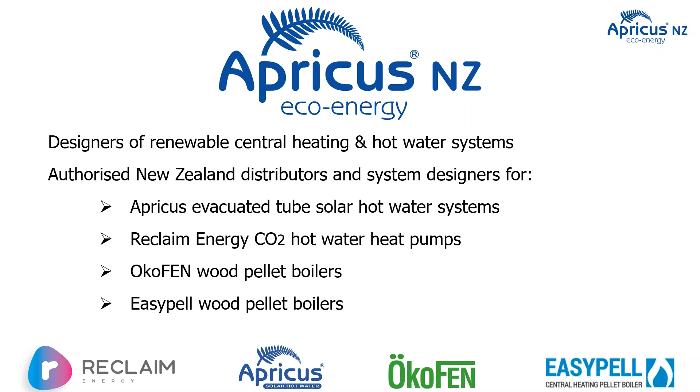Just a little bit of background about who Apricus NZ Eco Energy are. We're the designers of renewable central heating and hot water systems, and we design and distribute for a few companies. The Apricus name comes from evacuated tube solar hot water systems. We also do a CO2 hot water heat pump called Reclaim. We have the OkoFEN wood pellet boilers and Easypell wood pellet boilers, both from Austria.

So the first topic to cover off is solar hot water. And solar hot water is good for domestic hot water and process heating. There's a very small opportunity for heating, but it's not really that relevant. And just a bit of overview, I guess really this covers all the topics, but we are looking at a climate in crisis. And so the latest understanding and a declaration from the climate scientists last November was that climate crisis has arrived and it's accelerating. And it's pretty severe, and we're threatening ecosystems.

Now, it seems quite bizarre, really, talking in this way after the COVID-19 experience that we've just been through and, well, continuing to go through. And I think it probably gives us a bit of insight into what accelerating can mean and what severe can mean, and fate, etc. So some emotions and thoughts to dwell on as we try to unpack how we can mitigate and evolve. And you can see in the background, in February we had some flooding and we had a bit of drought as well, all at the same time.

And the recommendations are six-pointed from them. And number one, replace fossil fuels with renewables. So that's what we're going to focus on today. Where are fossil fuels in buildings, and what do you do when you have a bushfire plan and a flood? Well, we've got central heating boilers where the vast majority will be burning gas, coal, diesel, and to a lesser extent LPG. Domestic hot water systems, which are also burning gas in its different forms.

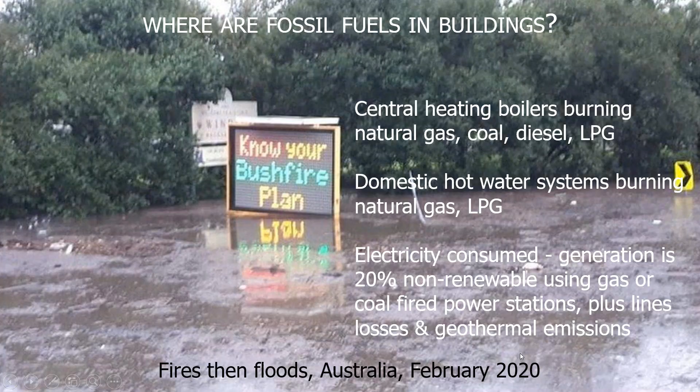So what are the experts saying about this? The New Zealand Green Building Council will be my go-to organisation for looking at this. They developed a net zero carbon roadmap for New Zealand buildings last year. Really good document. I'd really encourage you to read it and to use it as support for the decisions you're making and recommending to others.

And if we look at the emission profile, it's important how we build a building, and nearly 30% is taken up by concrete and steel and transport and waste and whatever else in building the building. But then a whopping 70% is in the occupation over the next 60 years. And that's almost all energy, and there's a little bit associated with water too.

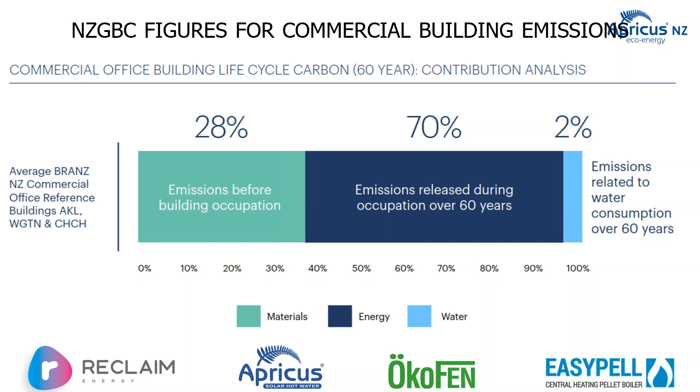So again, we're going to just keep on focusing in. We're looking at that 70%. We're looking at consumption. We're looking at the material, the use of the building. So the New Zealand Green Building Council recommended some standards.

2019, it feels old now, but existing buildings need to look at a carbon reduction plan with a strategy to phase out combustion of all fossil fuels on site by 2025. And their suggestion is that new buildings shouldn't have fossil fuels combusted on site. So these are reasonably bold statements, but we're living in some very bold times. And so as we progress through, no fossil fuel consumption in 5 years' time, 4.5 now.

And you could say this is the ravings of some minority people, and then you look at who it's funded by. So Argosy, Bayleys, Precinct, Resene, Warren and Mahoney. Now, Precinct and Argosy between them control multiple billion-dollar property portfolios, and they funded this roadmap. So we're not talking about a really isolated group speaking to themselves in a language that's obscure. This is very simple and clear and sets out some very understandable but also achievable goals.

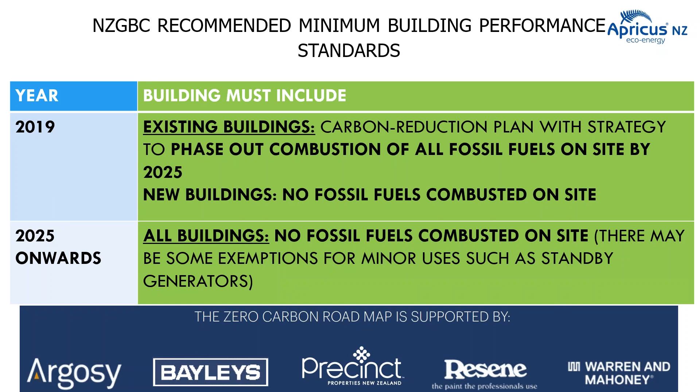So it really begs the question, how can we do it? Well, first of all, we need to measure. What is the demand? What is the system for? What's the function? Do we need it? Can we redesign? Can we minimize to optimize and reduce the function of the system? There's a lot of interest at the moment in passive house, and so there should be. And as it evolves, there will hopefully be less heating demand, but there will still be some, and not in all buildings can you make it completely passive.

But we need to be starting off at the top of the tree. It's very much like the waste hierarchy. You don't try and recycle everything you could possibly produce. You start to try and minimize what you're producing. It's exactly the same in energy. It's just a natural process.

And so once we've measured and minimized, we then try and eliminate, and eliminate meaning fossil fuels. At the end of the day, all energy on our planet comes from the sun. It's just a case of how long it's been stored for. Fossil fuels are stored solar energy from many millions of years ago, trapping carbon that was taken out of the atmosphere, and that we probably don't want to put back into the atmosphere, because the time that the dinosaurs lived here and that fossil carbon was being stored was some pretty wild time weather-wise, and I'm not sure if we really are prepared for that kind of wildness. So what can we do to make that happen?

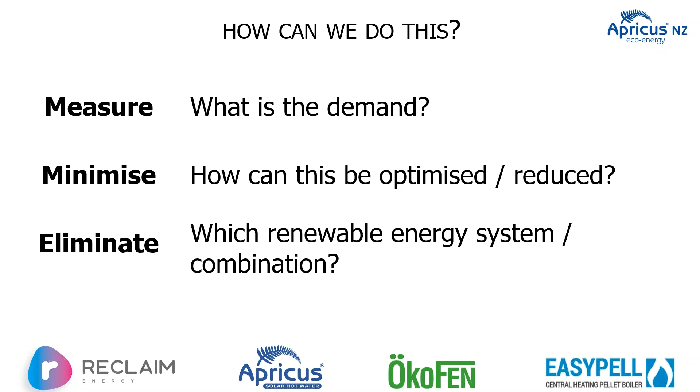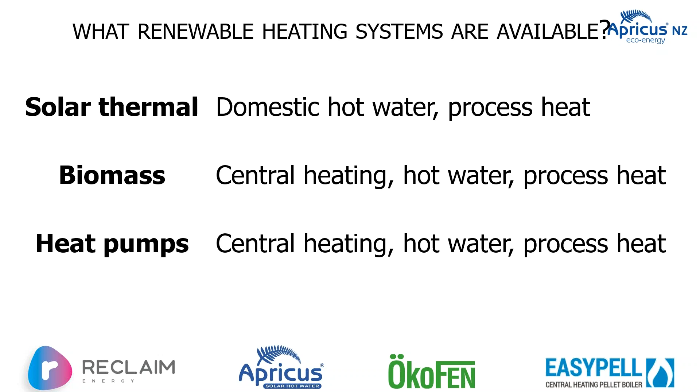Here's an overview. There are a number of different technologies. We're going to look very much at what's practical and available now. So solar thermal, biomass and heat pumps. If we look at solar thermal, there are 3 main technologies out there that we should acknowledge: flat plate collectors, evacuated tube collectors, and unglazed collectors. Just to deal with unglazed first, because it's easiest, they're swimming pools only. They're very good for low temperatures and high volumes and harsh chemicals, and to extend the season, but they're not really good for much else.

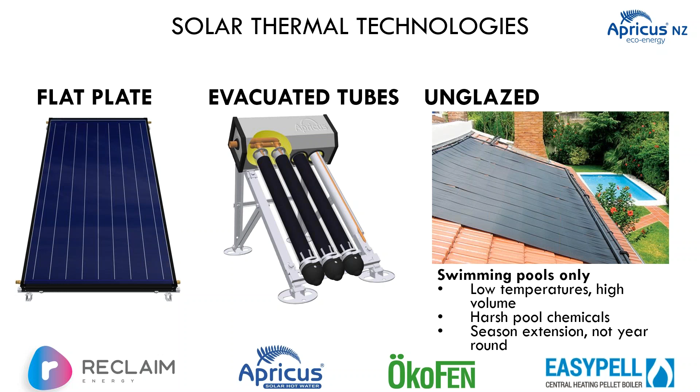So we're left with some form of insulated collector that is absorbing the sun's energy, transferring it to water, and then allowing it to be used at a later time. So if we look at it for an individual house, I'm going to do both individual homes and commercial, just because I think we all live in houses, and we certainly spend a lot more time in them at the moment.

And maybe we'll be working in them more as we go forward. So it's a really important part of the emissions mix, and it's an important part of our lifestyle. In a newly built house, the average use of energy every year is 46%, and that's according to the Waipa Network, the Lines Company in the Waikato.

There's a number bandied around a lot. People talk about 30%. That's for all existing homes, and generally really quite inefficient heating systems, inefficient glazing, insulation, appliances. Whereas a new house, it's got higher quality glazing, higher quality insulation, often higher quality heating, and yet they've still got the same amount of hot water being used, and it's the same energy used for the hot water. So actually, as a proportion, it's growing over time.

A solar thermal system will provide about 75% of the energy hot water uses. So you're therefore going to reduce total household energy and therefore carbon emissions and cost by around a third, 30% or so. And in this way, there's a really huge ongoing benefit. And I really emphasize this because I've got quite a background in assessing homes and home performance. And in a low income home, if you can reduce their monthly outgoings on energy by 30%, that has a very significant impact on household budget, on affordability, on food, on kids' lunches on the table.

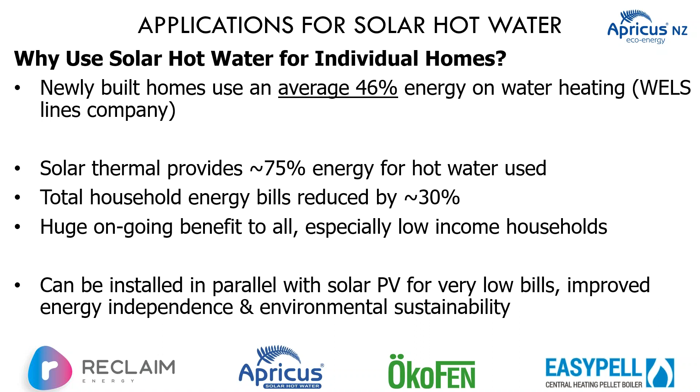Solar thermal can also be used in parallel with solar PV. It's not a competing technology. Unfortunately, there's quite a lot of selling going on where there's commission-based sales and people want to sell stuff. But if we're smart about how we use technology, they can sit side by side very, very well for even lower bills, energy independence, and environmental sustainability.

So hot water is usually the single biggest contributor to CO2 emissions from a household on ongoing energy use, because it's all year. It's not just like a heating load where you have it for maybe 3 months, 4 months a year, depending on the location. And also, again, heating can be mitigated with efficiency measures. And so we should also try and mitigate our hot water use with efficiency measures.

And so this has been represented really well by the New Zealand Green Building Council under Homestar. And in the 6 Homestar quick list, you can get 1 of 10 of the required points for compliance by installing a solar thermal system. And it also contributes more, up to 6 points if you do it with the full Homestar assessment toolkit under their EHC5 section. And really importantly, solar hot water under Homestar, and I would suggest this in all good design, is considered before other types of renewable energy generation.

It's an efficiency measure. It's the same way as you insulate a house and then you look at the heating load. You wouldn't just build a shell and say, I want to heat it, so I put a heater in, and then think about insulating it. What you want to do is reduce your energy consumption, mitigate it, and then try and use renewables afterwards. So the solar thermal, by providing 3/4 of that energy use, is reducing your energy consumption.

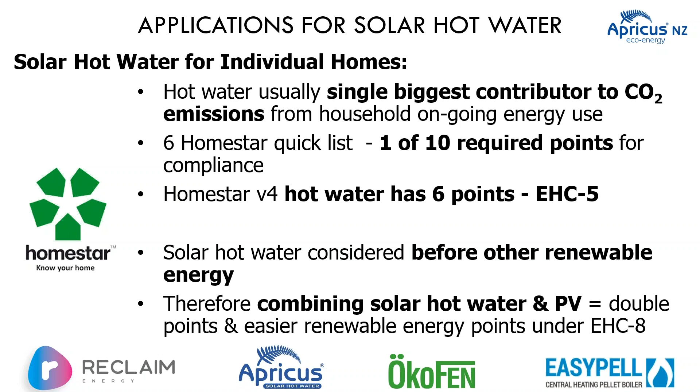And then if you combine it with PV, if that's the track you want to take, you're getting more points, and it's much easier to get the renewable energy points under Homestar. There's people who are familiar with that, but otherwise have a look at the Homestar information on their website. It's really good. So it doesn't have to be a great big blot on the landscape, and they combine very well. These are a number of installs that have been completed locally.

So what does it cost? Hey, I'm saying all this stuff. Can we afford it? Well, it's about $4,350 for most new builds. That's your 3-bed, 2-bathroom house, which the majority of houses today are being built as. That will get you a 30-tube collector on a 300-litre cylinder. It doesn't include the cylinder. I'll go into that just below. And then about $3,500 for a smaller house, 2 or 3 people. The top one's good for up to 5 people. You need to have a cylinder, but you need to have a cylinder to store any kind of renewable energy.

It doesn't matter if it comes from a solar thermal, comes from a heat pump, comes from solar PV, or burning biomass, because we're dealing here with energy in real time. We're taking the energy from the sun and we're putting it away, and we're just storing it during the day, I should say, and then for the next morning as well.

So it's real time. The only reason you can have instantaneous water heating through, say, gas water heaters is because that solar energy has been stored as fossilized carbon, and then we set it on fire. Instantaneous doesn't actually happen in nature. It's really important just to have these kind of high level and broad concepts to fall back on, to explain, oh, well, why is it not quite as convenient? Oh, well, because the sun doesn't shine all night and I want to have a shower at night.

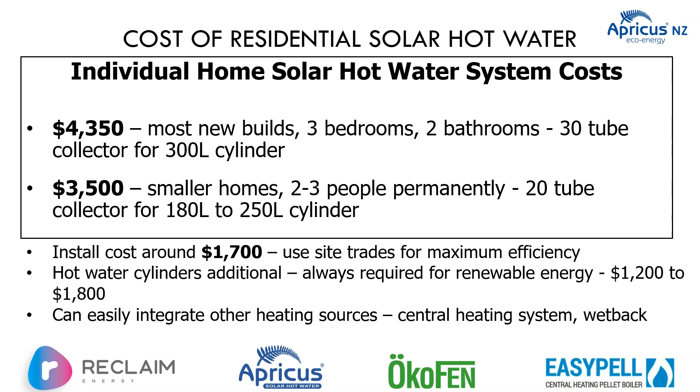So let's look at what is most appropriate. A battery is an amazing device to drive a car. A hot water cylinder is less so, but there's horses for courses. And then you can integrate it with central heating systems or wetback. It can be integrated with a building design. There's one up in Lake Hawea. I don't think it's too intrusive. Maybe we've got some architects that can tell me whether or not they hate it.

So let's move on to multiple residential and commercial applications for solar thermal. Domestic hot water has a really variable energy use depending on the building typology. And so in some buildings, it can be the dominant use: in apartments and hotels, residential care, sports facilities, food processing, excluding refrigeration, depending on what type of food processing that is. Of course, in an office building, it's not going to be the dominant use. So efficiency around lighting and appliances and HVAC will be a more important option.

But in other buildings, if we break down how much energy goes into hot water, then it becomes more of a priority. And so in a commercial context, we're usually looking at around the 50% mark because we have seasons. We have winter, we have cloudy days. If we're aiming for 100% generation all year, that means we have to meet 100% in winter as well. And so in summer, we might have double the output. And so it becomes very difficult to square that off because you've got a huge output, which is well beyond what we actually need, because summer is much more intense for solar radiation, and we have longer days.

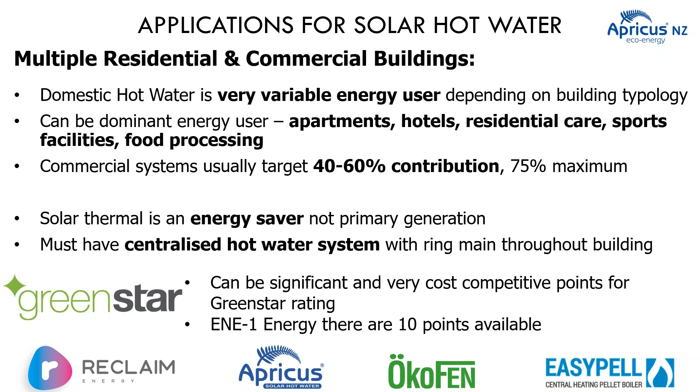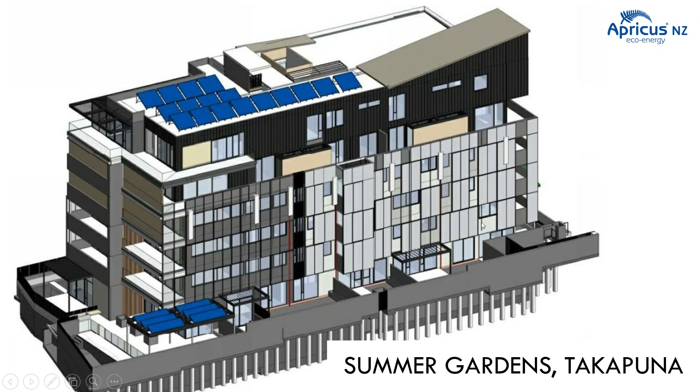But it can also be really cost competitive and really significant for Green Star. Again, back to New Zealand Green Building Council and their ratings. Under ENE1, there's up to 10 points available. So there's some projects that I can show you, like the Summer Gardens one in Takapuna, where there's been a big value management process and quite a lot of cool, neat stuff has dropped out. But the solar thermal remains because it's contributing significant points to their Green Star assessment. And as you can see, it's on the roof. And there's a reasonably complex roof here. We've got a number of different roof lines and services and facilities.

Interestingly enough, this is a plan of the roof. It doesn't quite give you the... actually, can you see? I need my little thingy, don't I? There's my little thing. Spotlight.

Here we go. So this is the raised up piece of roof that you saw in the previous slide. And what I'm trying to demonstrate here is that the... spotlight doesn't allow me to click.

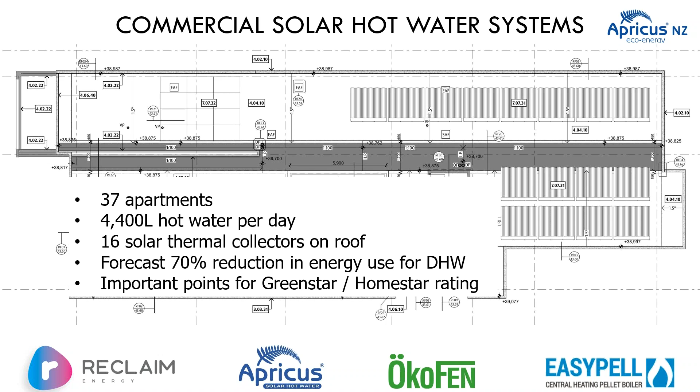There we go. So here we've got 37 apartments, about 4,400 litres of hot water a day. We're going to be using 16 solar thermal collectors on the roof, and we're forecasting about 70% reduction. That's because we're able to store a lot of hot water, and we're able to get through the evening and the following morning really well. And it's an important Green Star point contribution.

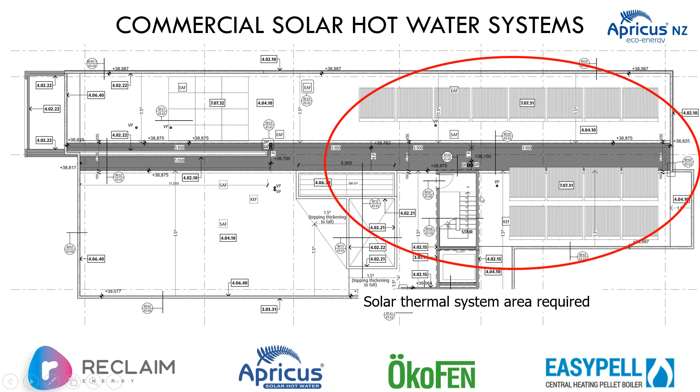If we just have a look at the roof area, it's quite important to understand the practicalities of this type of system and how they work in with a building, because that's the area required for the solar thermal. I've just done it in red to make it a little bit more obvious. And then we've got a PV area for the contribution to the penthouse. Now that is just for contribution, and I think they're also maybe running some of the lights around the building

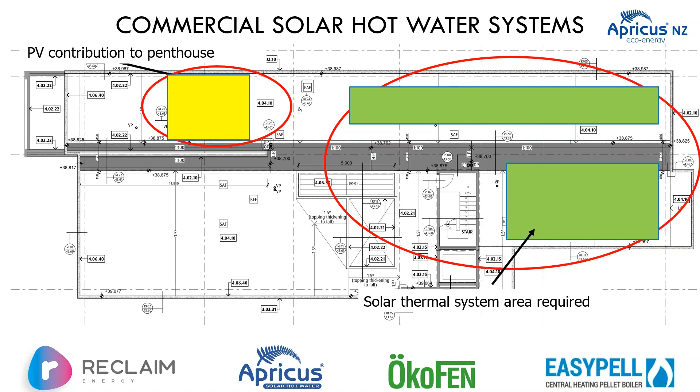So if we're going to generate heat energy, we use a heat energy system, a thermal system. If we're going to generate electricity, we use an electrical system. And the two can sit quite happily and play nicely together. And so when we've got an apartment building, especially a tall building, it's got quite a small footprint, quite a lot of density and quite high hot water use. So a thermal system makes a lot of sense.

If you've got a massive, great big warehouse or a shopping center, huge roof area, not very much hot water use, lots of electricity, lots of HVAC, lots of tills and lights and bells and whistles, great, cover the roof in PV, generate electricity. But if we've got a thermal load, let's use thermal generation.

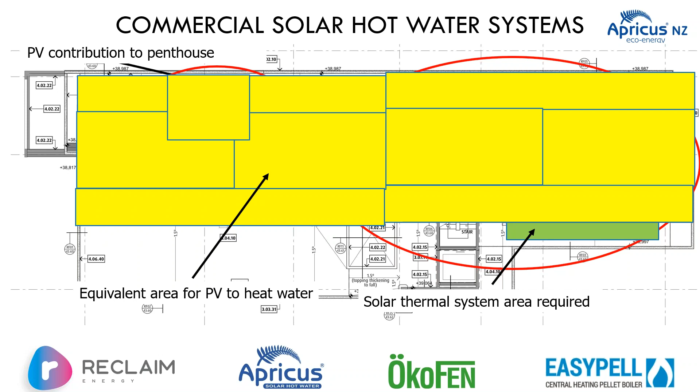So I'm just going to go through my trade secrets, so you guys will all be fully competent solar designers by the end of this session. It's always preheat for dedicated cylinders. And you must retain the heating capacity, because there will be cloud, there will be winter, there will be rain. And all of those things mean that solar thermal doesn't do as well as it could on a bright, sunny, beautiful, long summer's day. And still people want to bathe and shower and wash up and all those darned things that you do with hot water on a rainy day. So you have to retain the capacity to provide it in times when there isn't enough sun.

We always design the preheat cylinders depending on the hot water use profile. And so if the use is in the day, we don't really need to store that much because it's being generated and used straight away, real time. But in the evening, and apartments are a good example, most people are going to have the shower in the evening or the following morning. The sun's not available at those times, so we use more storage.

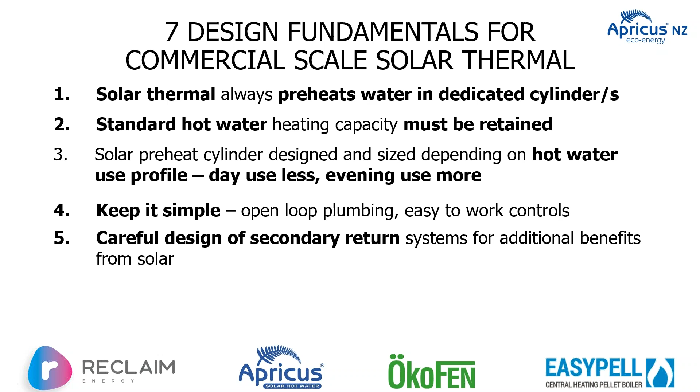We keep it really simple. And that's important because someone's going to have to maintain this and understand it that isn't highly specialized and technical, and it's going to be there for the next 20 years. So let's make it simple. Ring mains, it's getting a bit technical, but we carefully design a ring main so that we can get additional benefit. So when there is solar energy available, we're not just losing all the heat around the ring main through electricity, the sun can actually make that up.

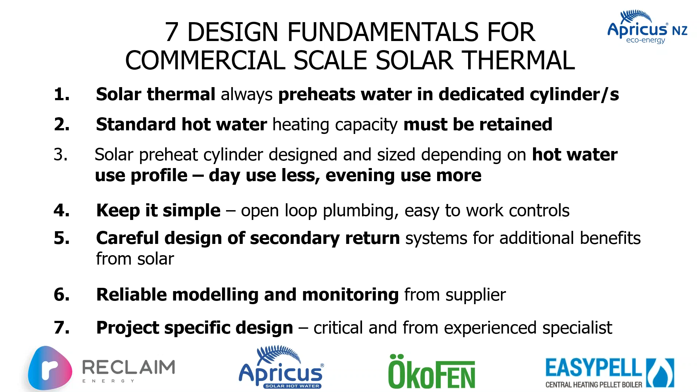Reliable modeling and monitoring is really important. With something as complex as solar thermal, it's important that it's defined from the outset, and then that informs project-specific design. And again, it needs to be from an experienced specialist. It's kind of like a motor has a pump in it often. Mechanics can understand all the motor sections, but if you ask them to take apart and remake your pump, they're going to go, nah. It's a whole different world in that little pump. And so it's a similar thing with solar thermal. We can have hydraulic engineers understand the whole building and systems, but the solar thermal's a slight beast in itself.

So just to give you some examples of the spread, this is at Lake Karapiro, the canoe racing New Zealand High Performance Centre, relatively small system, and they're only using around 650 litres of hot water a day. And our girls and boys that are smashing it get into a nice hot shower afterwards, which is awesome.

University of Otago Dental School, so we've got roughly twice the daily hot water consumption, and that's being backed up by electricity, so it's a very, very renewable system. A Lakeview holiday park in Wanaka, a much more extreme environment and massively varying hot water demand. Now, the nice thing about tourism, even domestic tourism, is that usually, especially with a campground, you get a lot more visitors in summer, and helpfully we get a lot more sun in summer too.

And so the profile of when you're generating the most heat versus when you're using the most hot water fits really nicely. So that's another important consideration. There's the daily curve, and then there's the annual curve as well. And we want to try and choose a technology that suits. If people come with a project and say, hey guys, I absolutely smash the hot water every winter, and then we turn off for 3 months in summer, solar thermal is probably not the right technology.

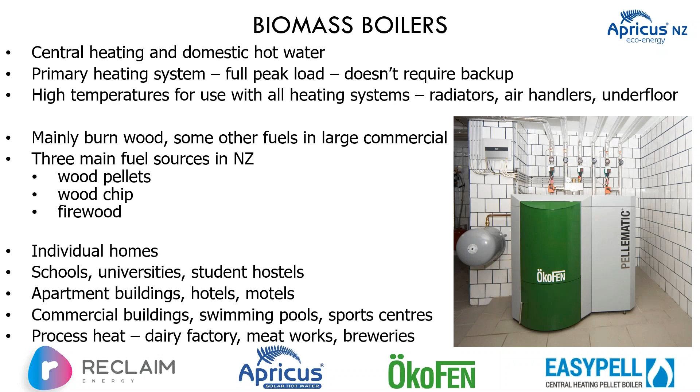They're also used a lot in process heat. And you probably would have seen the switch by Fonterra of their Waikato factory to pellets. That's really significant. And funnily enough, the biggest user of wood pellets in the world is the UK now, because in their coal-fired power stations, they're now firing hundreds of thousands of tons of pellets instead of coal. And it would be one of the biggest success stories in the UK's decarbonisation efforts. So this is really significant stuff at every scale.

So I'm going to focus in on wood pellets because it's the most flexible and the most adaptable to different situations. It's the lowest carbon fuel available in New Zealand. And it's really important to emphasize this point. If we look at the numbers, I'm going to get my magic wand out again. Here we go. All right. So taken from the emissions database from the Ministry for Environment, quantifying your emissions, wood pellets are 0.003 kilograms of CO2 per kilowatt hour.

Now, electricity in this country is really renewable. It's 80%. We're doing really well. It's, you know, what, 100 times? No, sorry, 30 times more CO2 intensive than pellets. Just the fuel origin, and then, you know, let's get into gas and diesel.

They're 100 times. The reason is wood pellets in this country are made from waste materials. They're made from waste sawdust and waste wood shavings. They're not going out and cutting down trees and hogging them and turning them to pellets. They're just taking waste streams. So all of the carbon in those pellets is already accounted for in the felling of those trees, and that's then recarbonized when it's replanted, and the manufacturing.

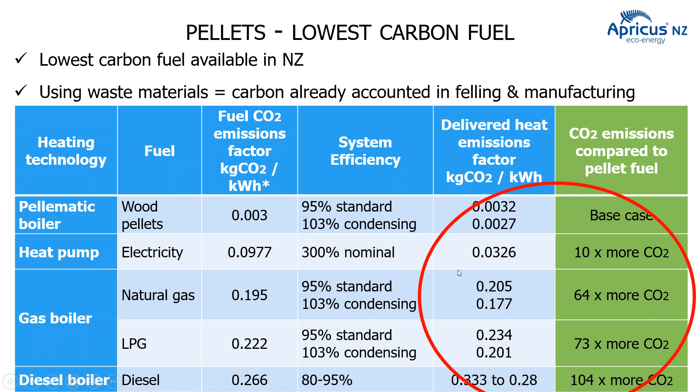And diesel, my God, I mean, would you park your car next to your house and plug the radiator into it? Probably not, but a lot of diesel boilers are installed in houses. But it's 100 times more CO2 than a pellet boiler. So it's difficult to understand why we're not using this more already, but that's fine. Well, that's history. We're in today, and now we can start. So presumably we're not using it because the fuel is difficult to get hold of.

Well, in New Zealand, it's, as I said, 100% renewable. There's 100,000 tons or more manufactured in a year here in this country from waste materials. We're actually a net exporter of pellets. We sell them to Korea. In the past, they've gone to China, to Canada. So we're sending a renewable fuel, 100% renewable fuel, the lowest carbon emissions available, overseas, and buying oil and gas and coal. So there's some interesting questions to be asked here.

There is distribution across both islands in bulk and retail. So you can get it from retailers in 15 kg bags from a large store beginning with B and another large store beginning with M and with the number 10 at the end. And the bulk deliveries can be delivered by the ton. And the manufacturers are offering multi-year fuel price contracts.

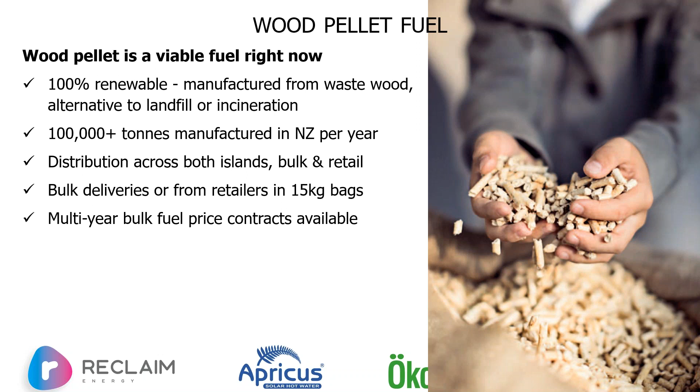I'd love to have a conversation with a gas retailer, say, okay, guys, I want a 5-year fixed price gas fuel contract from you as a standard, maybe not domestic, but a small commercial operator that is going to use, you know, $3,000 worth of gas a year. They'd laugh me out the building. But it's exactly what the wood pellet people are doing, because they've got a huge mass of sawdust banked up ready. The fuel's there waiting, it just is the customer.

So it must be really expensive then. That's why we're not using it. Not too bad, really. So 7 cents a kilowatt hour in bulk. Now, when I talk about bulk tonnage, I am talking about a few $1,000s worth a year. I'm not talking about Fonterra and 100,000 tons a year.

That'd be the full amount that we manufacture. But we're not talking dairy factories here. We're talking about a swimming pool or an office building or a hotel or a brewery or any number of small users. Schools are a really good example. I'm doing training in a couple of weeks on schools because there's still a lot of schools burning coal, which is bizarre. And then in retail, you can buy it for 12 cents a kilowatt.

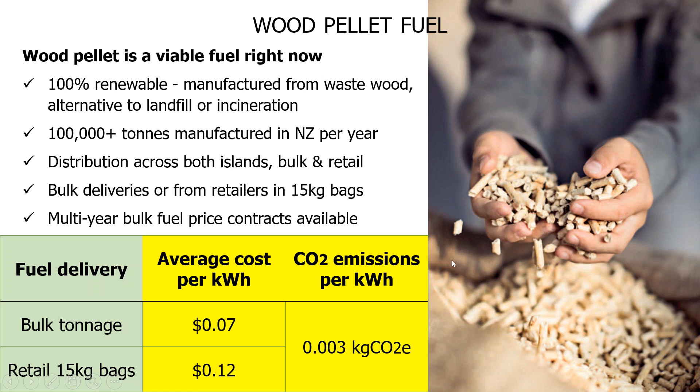And then I can't remember the name, I'm afraid, in Invercargill and Dargaville, who are more regionalised with their distribution. And there's a lot more storage available. And we've got a doubling of output from Nature's Flame, who are by far the biggest manufacturer, last year to 85,000 tonnes a year. So this is not an industry in stagnation or in decline.

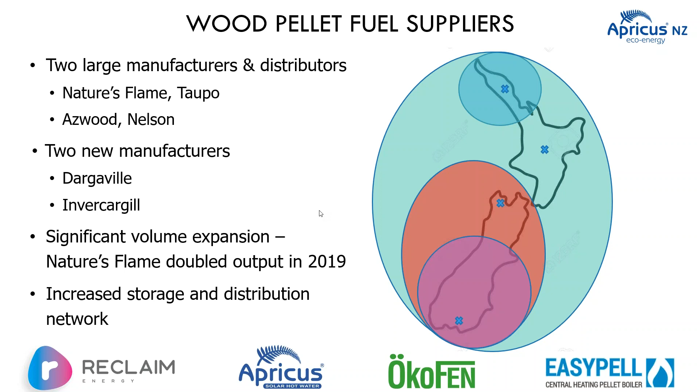There's no risk of explosion or self-combustion. You can chuck a match into them and they'll smolder away, and then it will go out. There's very limited fire safety requirements. There's an interesting project that we're involved with, a retrofit into an office building in Wellington, and they've got gas boilers in the basement. They can't replace the gas boilers because it's against the building code.

And being as it's a government-owned building, they really should be doing stuff to the building code. And so putting in a non-explosive, entirely safe, 100% renewable fuel would make a lot of sense. There's no global warming potential around refrigerants, and we'll get to that at the end. I've got quite a bit to say about that.

There's delivery methods and automatic feed from the bulk store to the boiler. So there's no manual handling either end. There's a pipe to put it into the store, and there's no manual handling to take it out of the store and put it in the boiler. And there's minimal flue gases with relatively low temperatures. They're very, very similar in emissions profile, at least in the visibility of the emissions, to a gas boiler, not in terms of the carbon though.

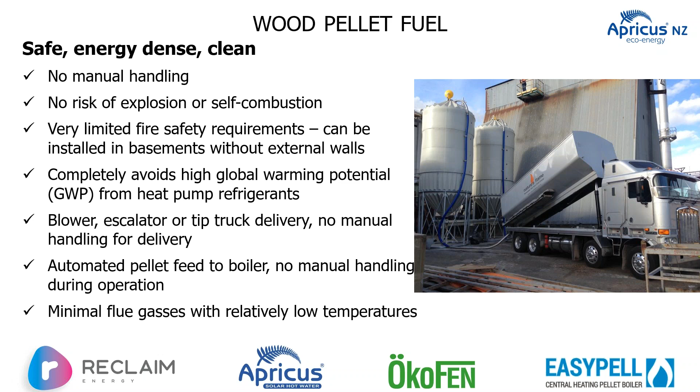So if you've got a low enough return temperature, you're able to extract the extra heat from the flue gases, and through the phase change of water and the condensation of it, you then get extra energy in exactly the same way that a gas condensing boiler works, and the same principle of phase change that a heat pump uses. So smart stuff. They're highly automated. I'm going to get my wand out, show you.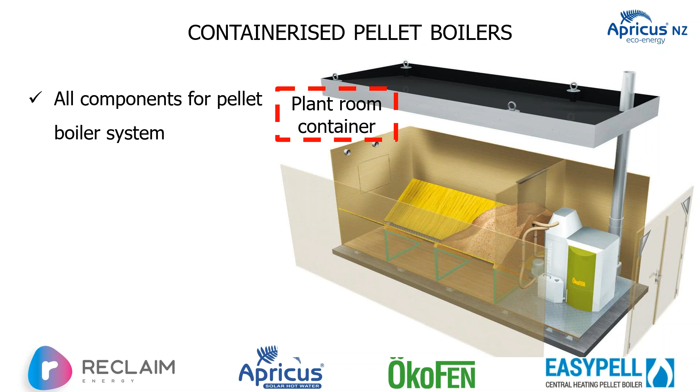Containerized systems, I think, are really exciting because it means that we can do systems no matter what the building is. Take a couple of car parks up, put a bike park maybe on the side of it to really illustrate the sustainability credentials of this whole project. It's a containerized system with a plant room. It's got the pellet boiler in it. This is a small example with a single boiler and a single feed, but you can have large ones as well. Fuel store, automatic fuel supply, water and power connections, everything you need.

And so you've got a really high level of cost control through doing this and consistency of design and delivery, guaranteed workmanship, because it is a specialist product. We want to make sure we get it all right, and it's completely modular and expandable. So there's no real reason, if a building has got a little bit of space outside and we can plug a couple of pipes and a piece of power into it, that we can't make these conversions happen.

And I think it's a really good opportunity for people to put their credentials and the actual action that they're making front and center and demonstrate this. It doesn't need to be our guilty little gas boiler secret that's hidden away in the basement. This is something that's really important for us to talk about and to get a lot of additional value from in that process as well.

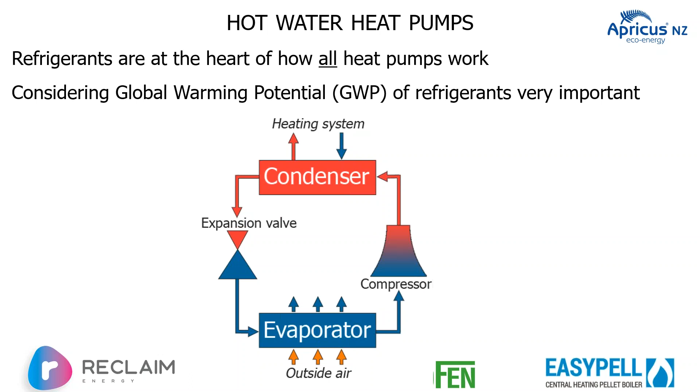refrigerants have something called global warming potential. We need to be considering this. It's something that is not necessarily on everyone's radar. It's why I want to raise it today. What is it? It's a multiplier of how much more potent any gas is for causing global warming. So we often talk about methane in the New Zealand context. It's 25 to 36 times more intense than CO2, and so therefore it has to have different mitigation measures, but it's shorter lived and yada yada. There's a lot of discussion around that.

Exactly the same with refrigerants. They have a global warming potential number. And so the lower that number is, the less environmental impact there is, the less climate change, the less we're going to alter the amount of heat that's retained in our atmosphere during its manufacture, its in-service and end-of-life disposal, if it's released. Now, a lot of refrigerant is released, unfortunately, because things break down and the refrigerant goes off, or it's not disposed of correctly at the end of its life.

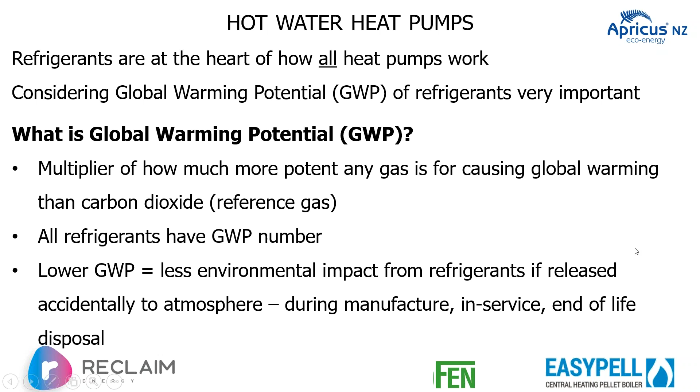And you see it in a skip, you just know that the refrigerant line's busted, the gas disappears, it's completely non-toxic, it's completely invisible, it's got no smell. You don't know it's gone, but it's doing a lot in the atmosphere. And so the global warming potential of refrigerants is a 21st century version of ozone depletion. So we've had CFCs banned because of the bloody great big hole in the ozone layer that's right above this country. And we all know with the melanoma what that means. So we have an understanding here of what long-term consequences there can be from short-term decisions.

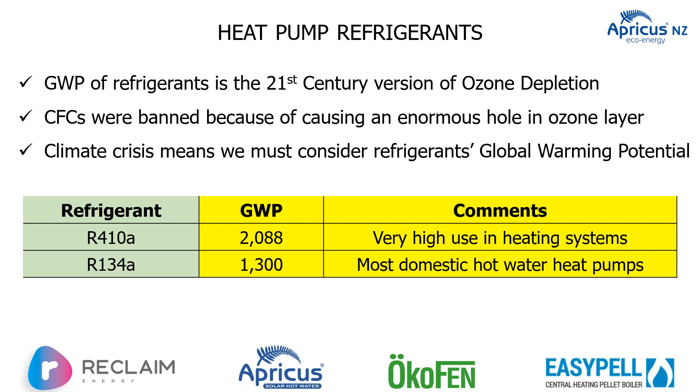And so now, in the position of climate crisis, we must consider the refrigerant's global warming potential. Unfortunately, the most common refrigerants used in the process of heating and hot water heating in New Zealand and often around the world have very high global warming potentials, 2,000 times the CO2, which is the baseline, 1,300 times the baseline. So what does this mean?

If you had a small domestic heat pump and it leaks refrigerant at the end of its life, okay? It might have a kilo of refrigerant in it, or it leaks sometime during its manufacture, during its use. It might have 1 kilo of R410A. So it's 2,000 times more potent than carbon dioxide, which is the base case. So it's the equivalent of emitting 2,000 kilos, i.e. 2 tons, of CO2 in terms of how much impact it has in the climate as a global warming gas in trapping heat in our environment.

In the New Zealand context, that's the equivalent of 21,000 kilowatt hours of electricity generation in CO2 emissions, because we've got really renewable electricity. So it's actually an enormous amount of electricity, or nearly 5.5 years of a family of four's hot water use, using 200 litres of hot water a day. That's a reasonable amount of hot water, that's a very comfortable living style. So it may well be longer for less hot water use or smaller families.

So fundamentally, if you have a heat pump which has got a standard refrigerant in it, and something goes wrong and that refrigerant is emitted to the atmosphere, you're already in debt, let's say, carbon debt. You've emitted the equivalent of 5.5 years of family hot water. This is just 1 kilo. Large commercial systems will have multiple kilos of it. Hopefully they're less likely to leak and they're going to be dealt with much more professionally at the end of life. But it is a fact that we need to consider.

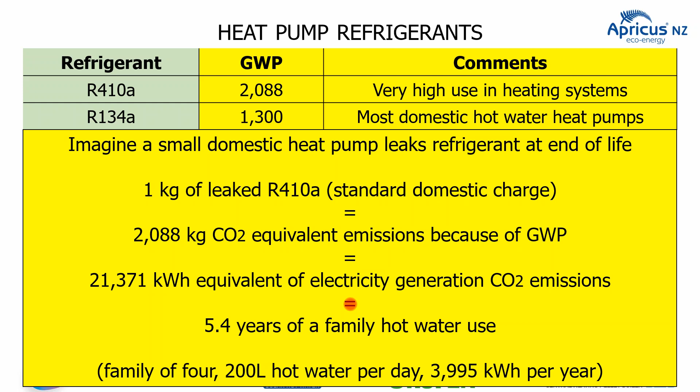I was having a really good chat with Sam Archer from the Green Building Council earlier, and he said that it's something that is being looked at globally, and it's something that we're really needing to focus on here as well. Doesn't mean we shouldn't use heat pumps. What it means is we should be, I've got to turn the magic wand off, we should be looking at alternatives. So there are lower ones. R744, just code numbers, which is also known as carbon dioxide. It's the base case. So it has a global warming potential of 1.

R1234ZE, which is my favorite name, has a global warming potential of 7. So those are both direct replacements, with appropriate systems of course, for 134A, which, if we just go back a slide, had 1,300 times the impact. So we're now talking about 1 and 7, much nicer numbers. And then R32, which is a direct replacement for 410, which is 2,088. Now we're at 675. It's not too bad, better.

So if you're going to specify, ask questions, get a better form of refrigerant. And if they roll their eyes at you and say it's not possible, walk away, because there's plenty of manufacturers and suppliers and installers out there that do good ones.

So what opportunities are there? I think we really need to concentrate on replacing low efficiency fossil fuel burning appliances. So instantaneous gas water heaters, they're a bit of a nightmare, in all honesty. They burn a fossil fuel, it's 100% non-renewable, and they burn it at 80% efficiency. That's their badged efficiency, regardless of how much it drops off over time.

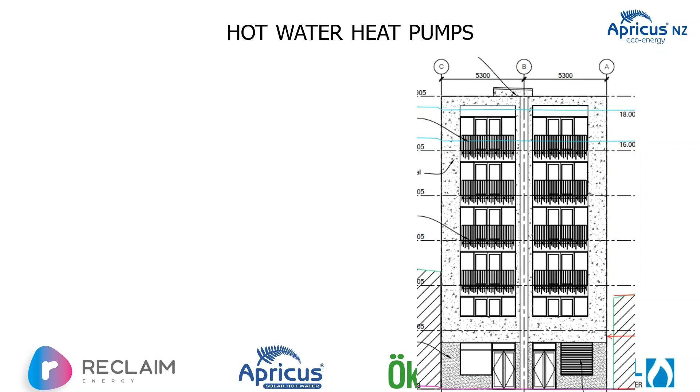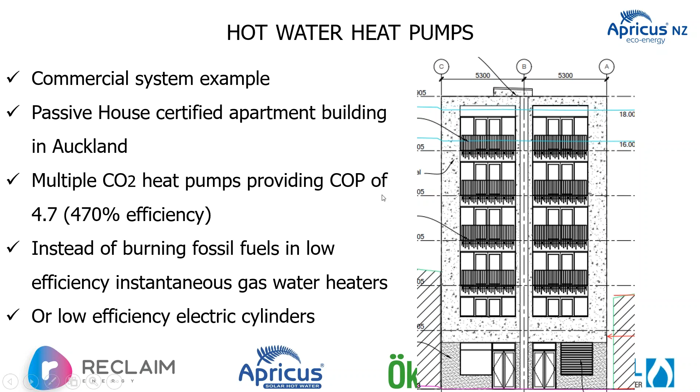So quick case study. I've ranted and railed against instantaneous gas water heaters, and you're saying, well, they're really practical. Well, heat pumps can be pretty practical too. So here's a commercial system example. There's a passive house certified apartment building in Auckland that's to be built. It's going to have multiple carbon dioxide powered heat pumps with a COP of 4.7, so that's 470% efficiency, not 80%. And it won't be burning fossil fuels, and it won't be losing efficiency through low efficiency electric hot water cylinders.

It's a pretty dense living environment. As you can see, there's 4 apartments, single beds, on each floor. And then on the ground floor, we're going to have some heat pumps here in this void. They'll be stacked up the building. I'd like to lift my mouse and it's not coming up the building, but you can imagine the vertical height. And then a series of cylinders, which will be hidden behind the bike racks, and then a ring main circulation system.

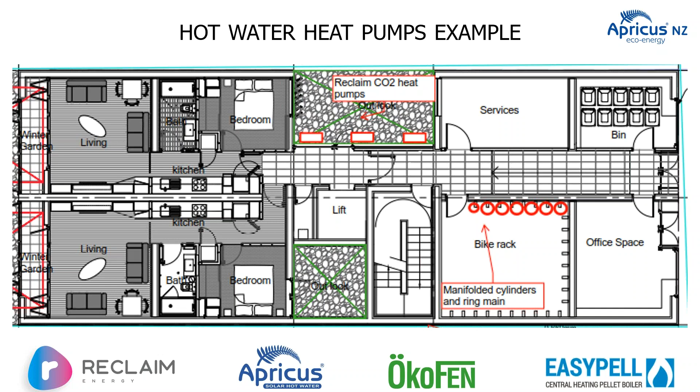We've worked out that the running costs were something absurd for all 22 apartments, something like $40 a month to do hot water for every apartment, total. And that's me, done. Questions?

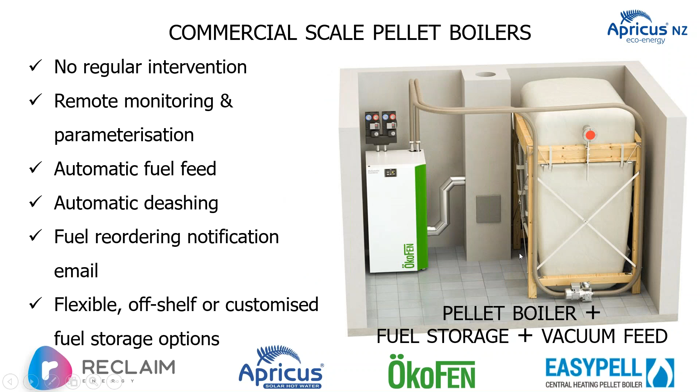Sorry, my screen's gone all crazy. So we can do systems. I'm just coming back to that slide where it's entirely self-contained, and so it's really a kind of plug and play, drop-in replacement for a fossil fuel boiler. And I think that's an ideal scenario in a school, where you plonk a couple of containers down.

And even further to that, it's really interesting what you're saying about being in the Bay of Plenty. So am I, and I think there's an incredible educational story here, and emotional connection. We've got a generation of students who are feeling a lot of stress about climate change, and the strikes and the protests are a demonstration of what they're feeling, and for bloody good reason, frankly.

So if we can demonstrate actively and positively what measures the schools are taking to mitigate that, and if we look at a school's direct impact, if we exclude the transport of the pupils to school, by far the biggest impact is the heating system, because you're often burning a fossil fuel. So if we can remove that fossil fuel and demonstrate it, and we've developed classroom materials to do that with the kids, and encourage others in the industry to approach it as a holistic process, and to replace these items that it's really readily available to do.

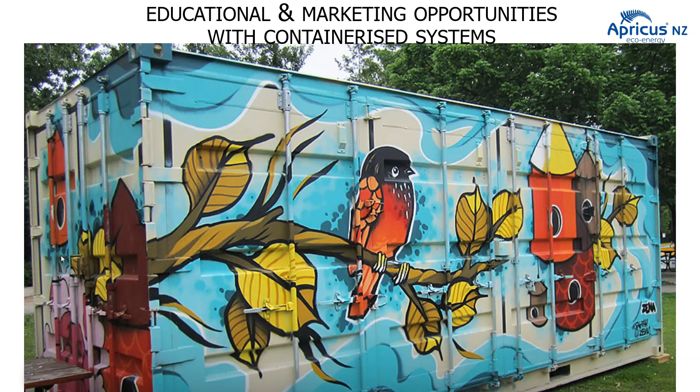A lot of it's about making use of the available space, and when you give up a coal-fired boiler and the space surrounding it, you're gaining a lot in the sense that you don't have to put something as big back as a replacement, and you've also got a lot cleaner system. I find it incredible that we're still burning coal.

The environmental thing is one side of it, but also I went into the Netherton plant room, and the big fat steel pipes are literally rotten from the sulfurous emissions from the coal. And you're like, hang on, my kids are breathing this? Someone might work in the school 30 years, and every winter they'll be breathing it. A lot of our schools are in a little dip, in an inversion layer, so the fumes all hang out there.

Yeah, enough said, eh? Hey, I'm just going to turn the light on.

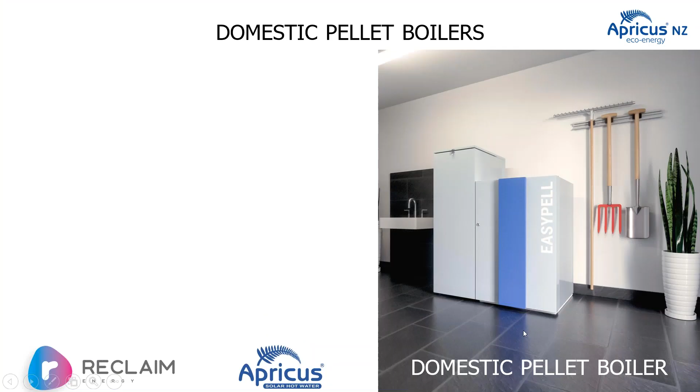Yeah, absolutely. Hey, this doesn't even need to be restricted to this presentation, does it, Mike? Can I be naughty and show other things? Yeah, if we can bear in mind, we've still got another 4 questions or so to come to. We don't have a technical limit, but it's more a case of getting through them. I need to find my presentation again. Let me address that with you, Alexis.

Fundamentally, you've got a shipping container, which are readily available. You've got boilers. We are one of 6, I would say, distributors of good quality. I think it's all European, from my understanding. I don't think there's any American or Canadian brands here. And then essentially you're plugging the pieces together. The benefit of a containerized system is that the manufacturing can be done off-site by specialists.

The mechanical services contractors around the country are all really skilled in the things they're experienced with, but they may not have much experience with bioenergy. So the containerized system is designed so that all the specialist bits are done off-site for a guaranteed fabrication, and then freighted to site and placed.

They'll come pre-commissioned, but our company and I'm sure others would then come to site and commission it, working in collaboration with the local mechanical services contractor, and in the schools context, and to a certain extent commercial buildings, the on-site maintenance people, and explain how the fundamentals work and what minor maintenance there is.

I'm just curious to know if you've ever seen solar thermal deployed with large energy users, perhaps like industrial sites. These could be sites that might use a large amount of hot water continuously. Is there a cost-effective deployment of solar thermal at sites like this, or does it more depend on smaller users that can shift? No, absolutely. I took out a slide of my presentation because I didn't want to overcomplicate things, but let me just open it up now.

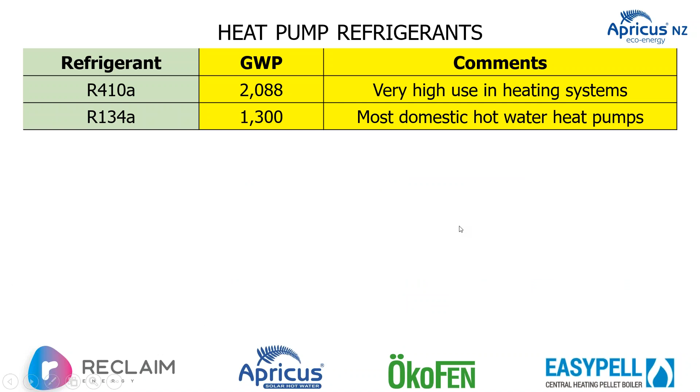The challenge is also temperature. I'm not sure what the gas boilers, but the gas boilers are currently connected to radiators. At the university, we've got everything from 100 years ago to last year. So even you can pick a building and it's got a mixture of coils inside air handling units plus perimeter radiators, or you could have anything out there depending on the building.

So as temperatures rise, the coefficient of performance of the heat pump does drop off. And the CO2 heat pumps are able to maintain those much higher temperatures, but it is at the cost of having a low inlet temperature. So if we're talking central heating, they don't tend to do very well at large volumes. Well, they don't get used for it, basically.

You can have cascading systems, so they use a couple of different heat pump gases so that you get the best performance of each one at each stage. But now we're talking about very bespoke, very expensive gear that I doubt would be vaguely economic for the distributed system that you're talking about here. I would encourage efficiency gains to be looked at really carefully around heating, but of course then there's a lot of capital cost around that can be quite difficult in the existing building.

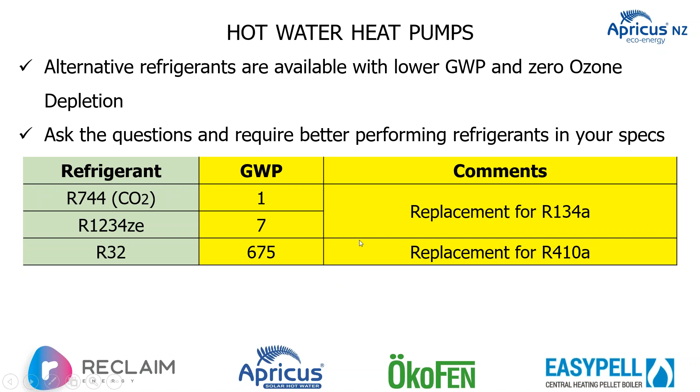And a small pellet boiler may be something that is functional. It might not be a containerized system, or it may be a container and it then heats 2 or 3 buildings that are close enough to allow you to plug in, as it were. On a campus style facility, you might have enough space between buildings, because a 20-foot container will do a 64 kilowatt boiler. Two 64 kilowatt boilers, or 3, depending on the amount of fuel storage in there. And so you can get some pretty significant amounts of heating out from quite small areas.

Yeah, it's a massive challenge, I think, for us as a species and as an industry, that distributed system of heating, because gas is very convenient. It comes in a pipe, you hang a box on the wall, gives lots of energy, and it turns off and on when you want it to. So creatively working around that is going to be a challenge. Especially when you're in the heart of the CBD and you've got as busy as anything Symonds Street, and you don't want to be the one responsible for increased truck numbers in an already congested inner city. Yeah, you can get around that with time of day of delivery or something like that. But yeah, I agree. It's a challenge.

Maybe electrification of radiant heat, but then we go back to the same problem of peak loading on the grid and not wanting to increase that. So it's a challenge, isn't it?